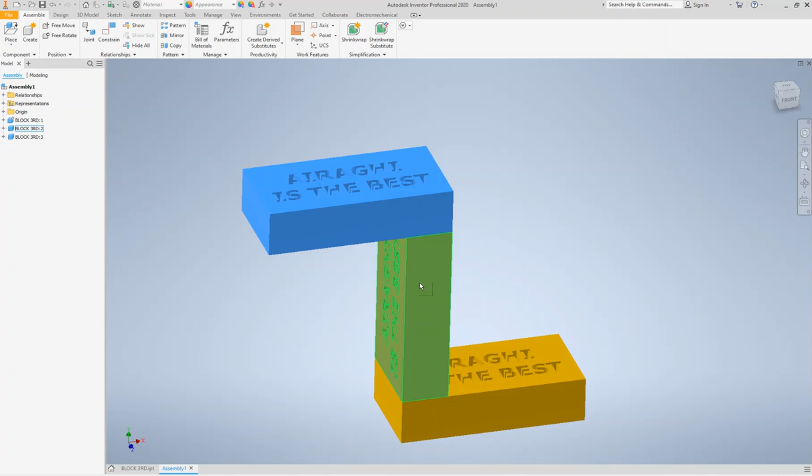Here is my Jenga block video and how to put it together. If you move around the screen, the way you're going to turn this in is you're going to rotate around to make sure it shows different angles, showing that it's actually put together. You're going to use between 6 and 10 blocks, preferably 10, to make something you can see.

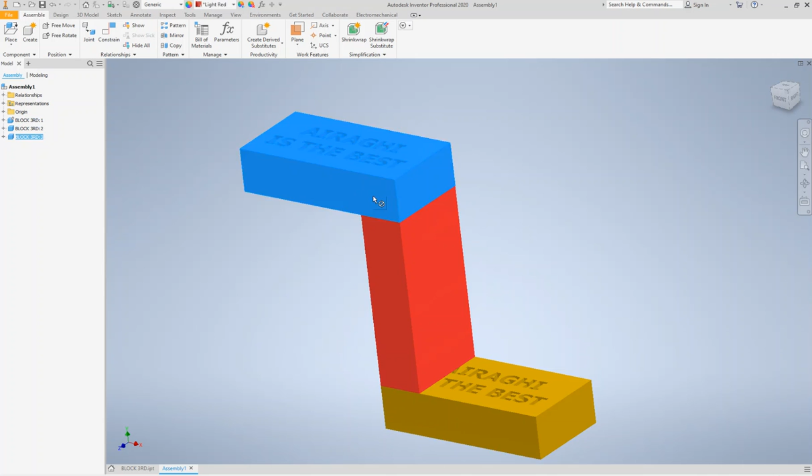Then you're going to grab them and show that they won't move, and which one's grounded. All right, let's explain how this goes together. The first thing you're going to do is create a block with your name on it.

You want to extrude and cut the text in to make sure it doesn't interfere with it moving around like this. All right, so you do have to save it, and then you're going to create a new assembly.

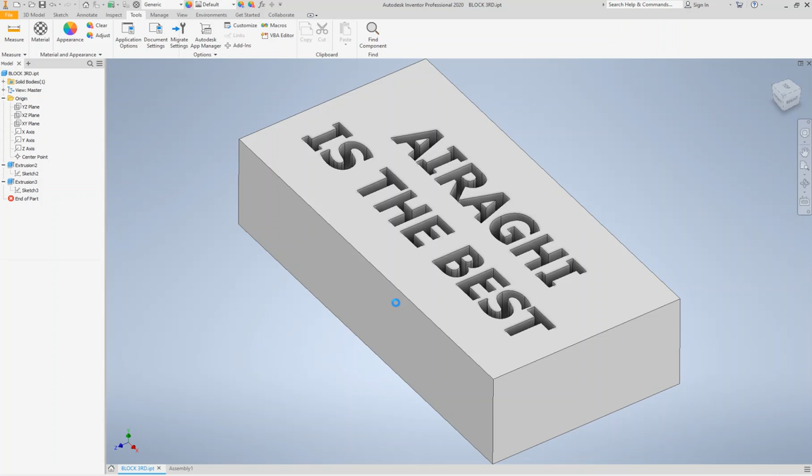You can do it that way, or you can go up to File, New, Assembly, either one. You're going to place in the part, and you're going to do it 2 at first, then 1 at a time after that to make it a little easier for yourself.

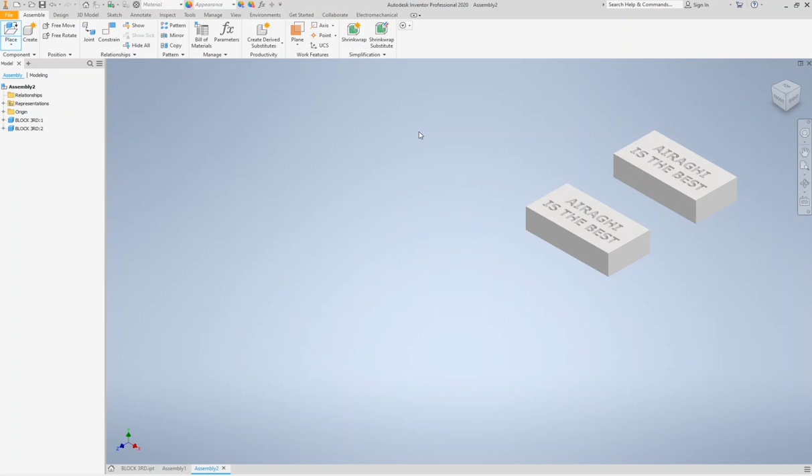So I'm going to add 1, and then I'm going to add a second block. This one moves around, this one moves around. I'm going to ground this one. So now this one doesn't move around and this one does.

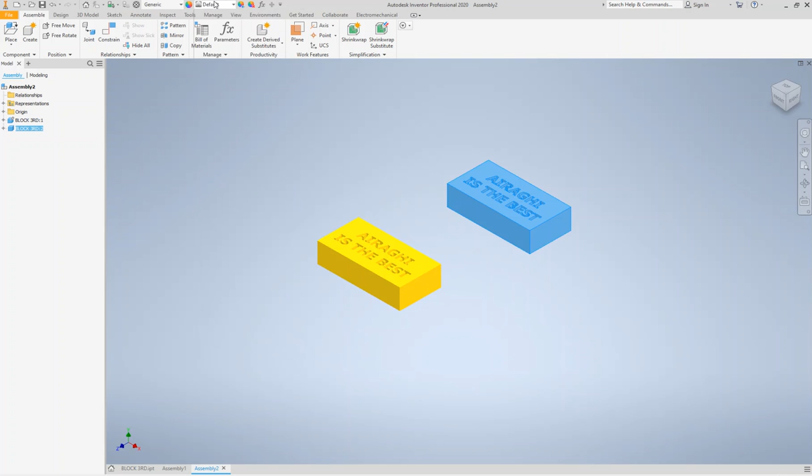Then what I'm going to do is make each one a different color. Let's say maybe this one's dirt - that's not a good color because you can't see the text. How about glossy gold? All right, and then this one's going to be... I don't know, copper. Ooh, that one's not good either, you can't see the text. Let's do cork - yeah, that's good enough.

So now I'm going to come up to constrain, and I want you to understand 2 things. We're going to use mate for the type of constraint, and then the solution. I know this is also called mate, but you have mate and flush. This is like gluing 2 pieces together, and if you look close, you can see it looks like 2 pieces glued together.

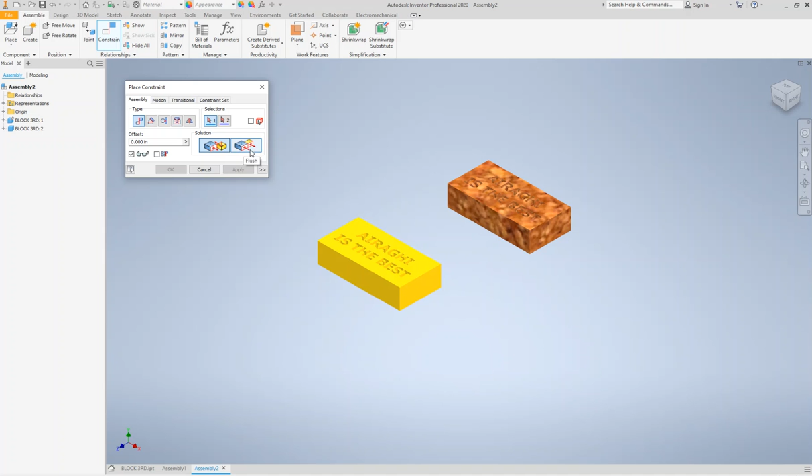This is two pieces facing the same direction and aligned with each other. So the 2 faces are facing each other, and the other one is they're both facing in the same direction. So I'm going to start with mate, and I'm going to choose here to here, and I'm going to hit OK for now.

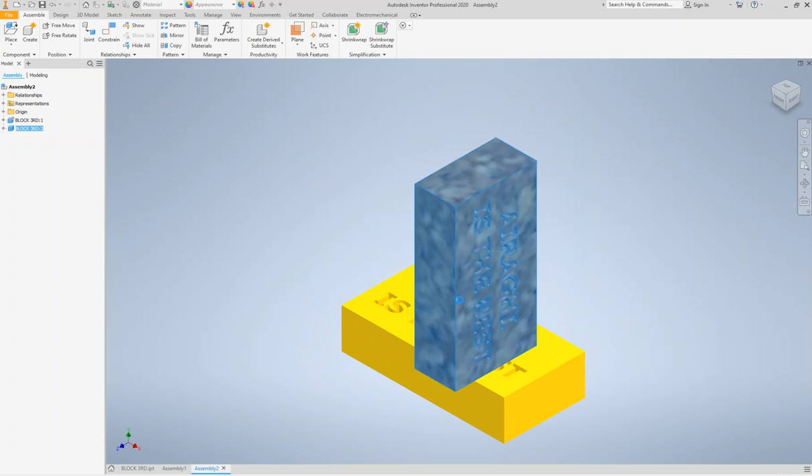I'm going to go to the front view, and you can see that it's glued down, and then I'm going to go this way, and you can see it's glued down. But if I go to the 3D view, you can see it looks like it's just moving around on the same plane. So it doesn't actually look like they're attached, but they are.

So the second thing I'm going to do is go up to constrain again, and this time instead of choosing mate, I'm going to choose flush. I'm going to choose the side, and I'm going to choose the side. Then you can see it moves back and forth this way, but I need to either mate it this direction or this direction to lock it into place.

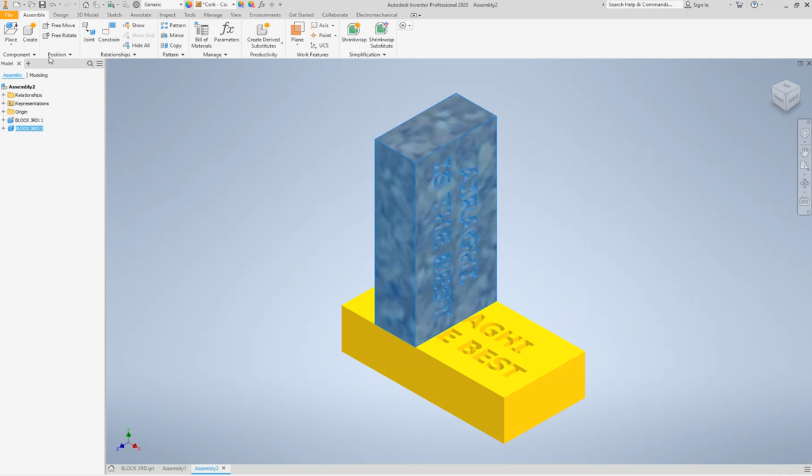So I'm going to go up to constrain one more time. I'm going to go to flush. I'm going to rotate around to the back, and I'm going to mate these 2, or flush these 2 together. Now when I try and move it, this is stuck together and this is stuck together. Now I have a successful mate and 2 flushes.

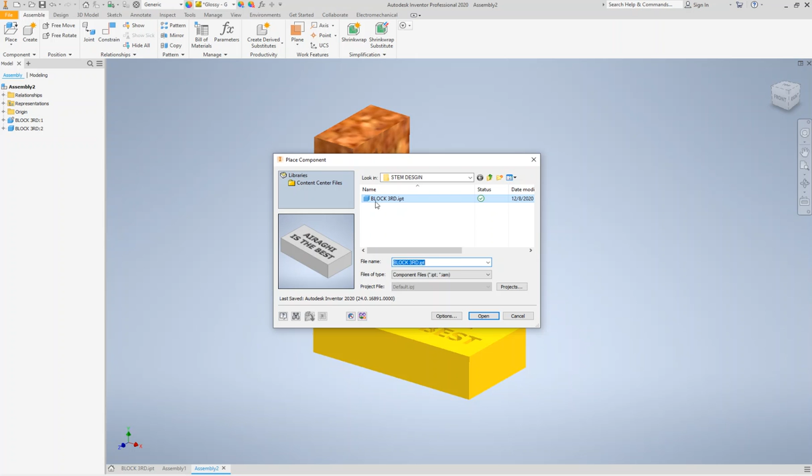So now I'm going to place in 1 more object, and we can do this however you want, but I'm just going to show you it up here and off to the side. So I'm going to put it over here, and I'm going to change the color of this also. Let's go down maybe light red, okay, something like that.

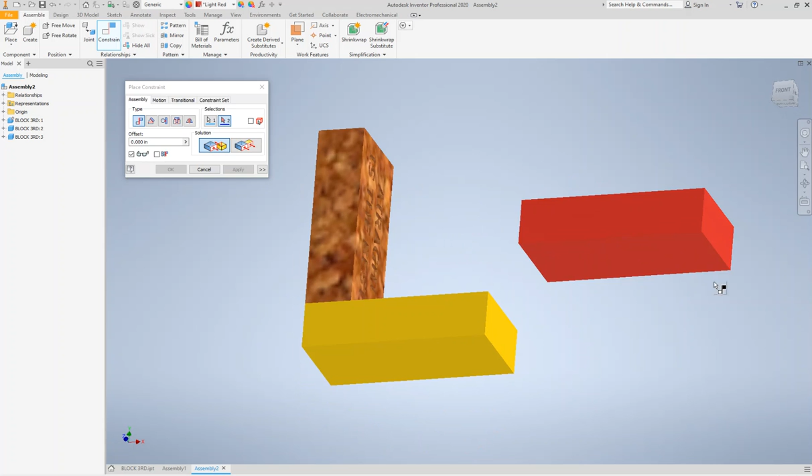And I'm going to go to constrain again, and this time I'm going to start with mate again. I'm going to mate the top of this to the bottom of this, and I'm going to hit apply. Now those are stuck together.

Now what I'm going to do is flush the side of this to the side of this, and I'm going to say okay. So I have 1 mate and 1 flush, and you can see it slides back and forth just like this. So the last thing I'm going to do is 1 more flush, so 1 mate, 2 flushes.

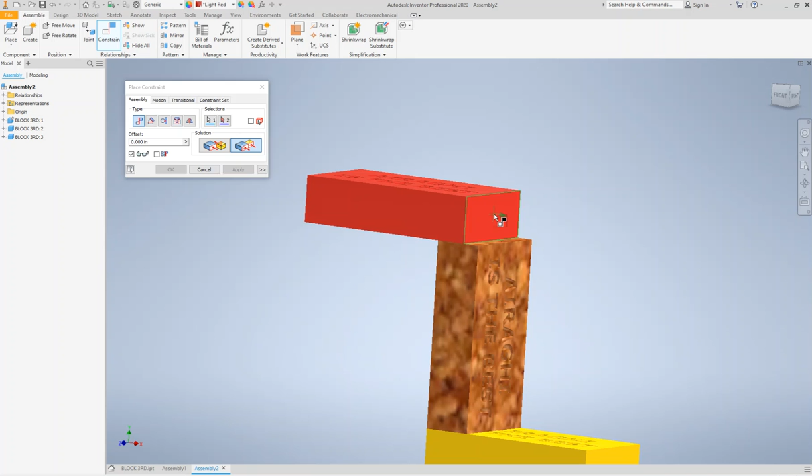I'm going to put that to that. And then I can rotate around, and you can see that this is stuck on, this is stuck on, and this is stuck on, and that's exactly the way I want you to create your little video to turn in. So you're going to make sure this is grounded, this is stuck, this is stuck. And that's it.